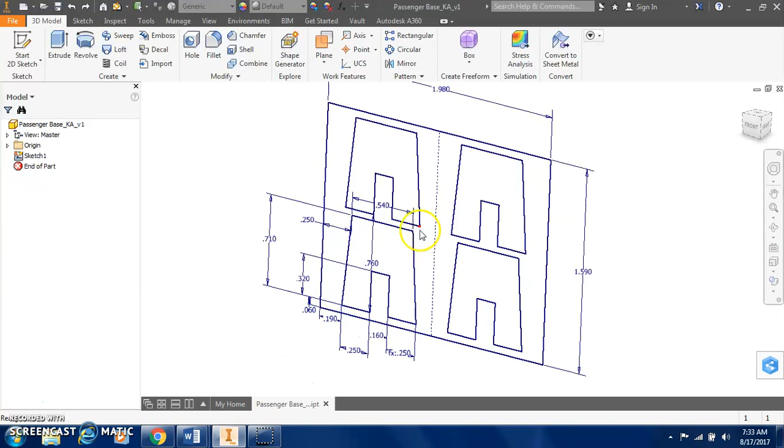One of the last things that we need to do is to create the fillet on the corners here. We can either do that before we extrude or after the extrusion. So to go back into this sketch, if I'd like to do it before extruding, double click on Sketch in the browser bar. And when we choose fillet, the radius for that is 0.2 inches.

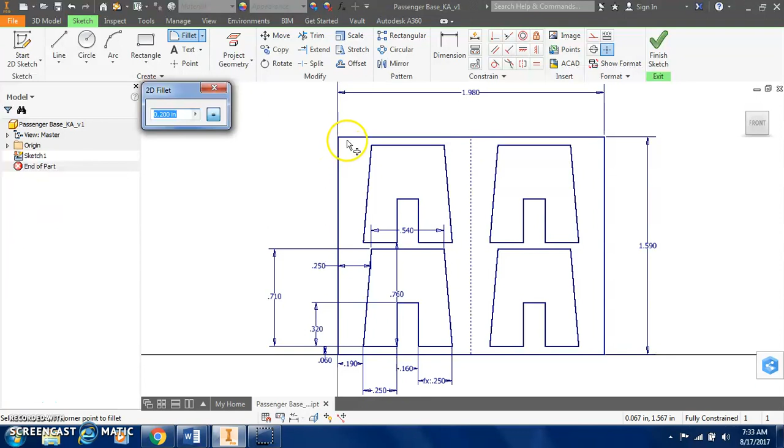And from our dimension drawing, we can see that here in the top right corner, 4 times the radius 0.2, because of course there are 4 corners for us to fillet. So we have it set at 0.2. It kind of gives us a preview of what it would look like. And so you can click in the corner to make that happen.

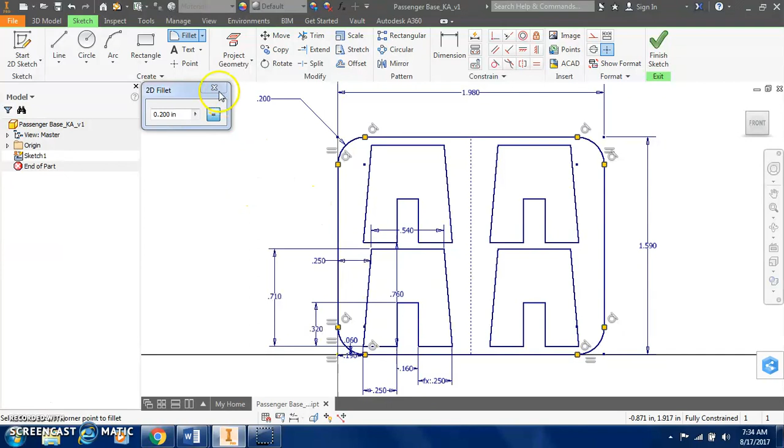And obviously it throws some things off. Ignore that for now. And just keep clicking around and it resets itself so everything is properly positioned. Alright, so the fillets are finished.

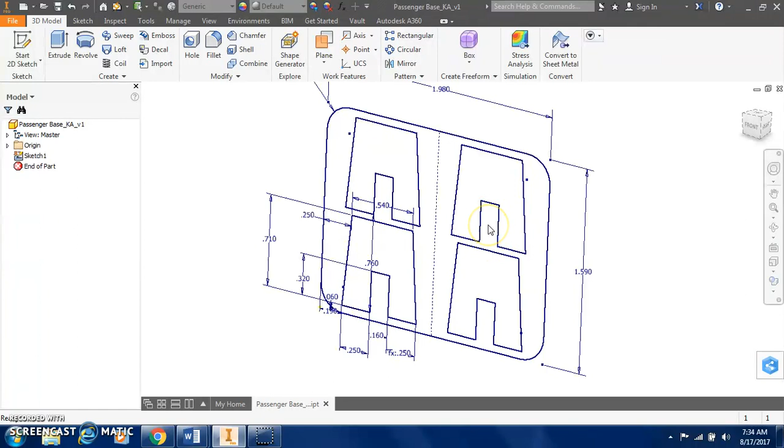And earlier I said that we would create these blocks separately. That's not what's happening here. Because of the way I've created this sketch, when we go to extrude this, it's going to extrude as well. So we'll manage that when we get there.

So let's extrude. The depth for this extrusion is 0.31. We need to select the face that we want to extrude. Make sure the distance is 0.31 and click OK.

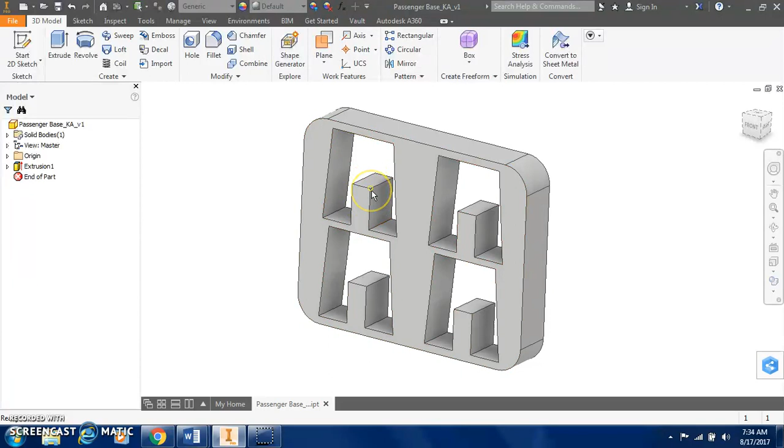So as you can see, these blocks have extruded as well, and according to our dimension drawing, we need those to sit back just a little bit from this front. The measurement for that is 0.03 if you were to measure that with dial calipers.

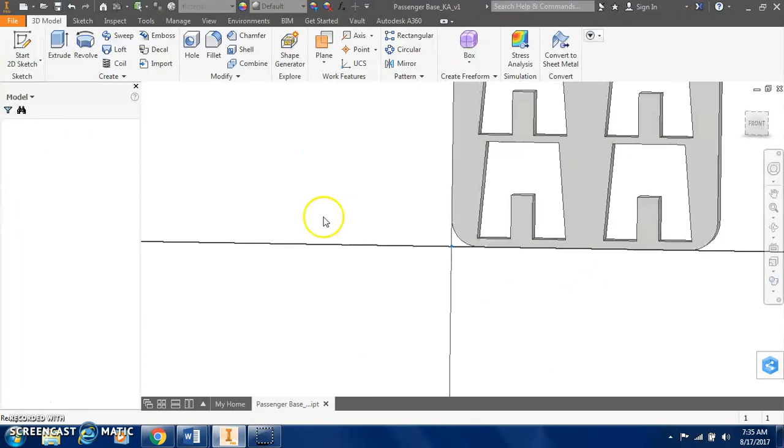So back in Inventor, we're going to create a new sketch on this front face, and we're going to start by projecting geometry. That way we can place a rectangle here, and we'll create a cut to push it back that 0.03.

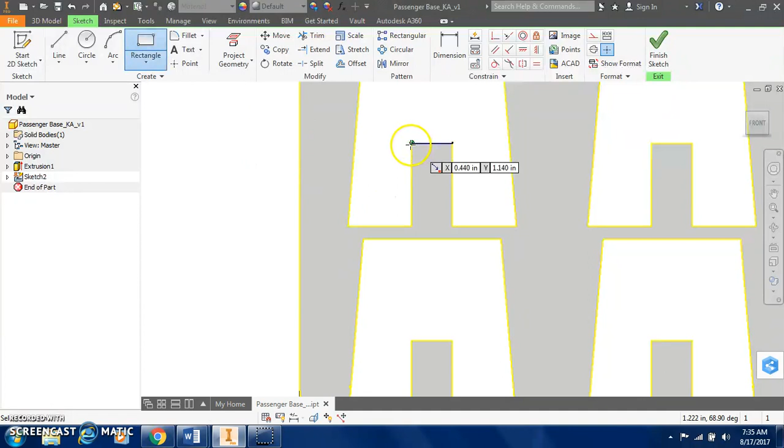So let's place a rectangle on the front of each one of these blocks. Be sure things are turning green in the corners to make sure it's lining up properly with the geometry that we have.

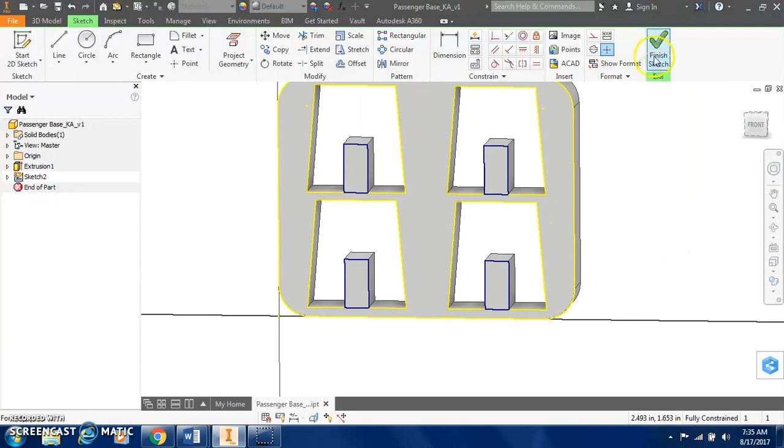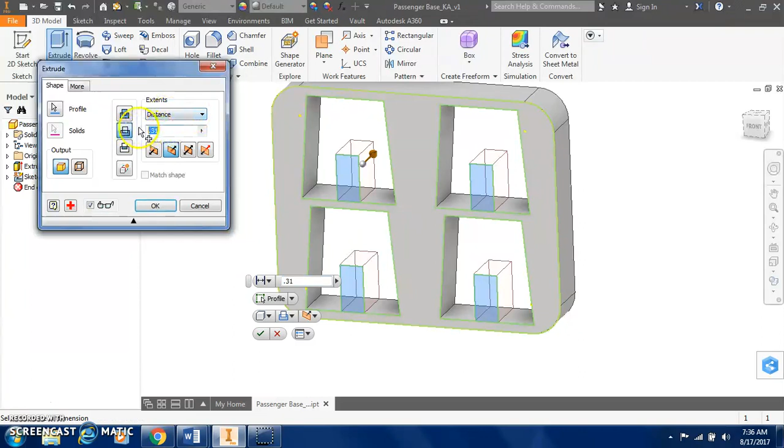And so now that we've finished that sketch, we can actually extrude all 4 of these sketches that we made, but we don't want them to pop out. We actually want them to be a cut going the opposite way as it's showing now. And yes, we do want a specific distance. It's going to be 0.31. Click OK. And it cuts them back just that much. This would be a good time to save.

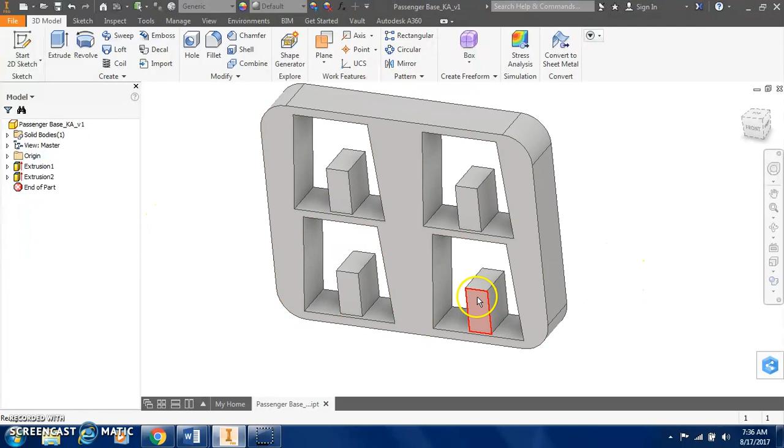There are a couple more steps that we need to take. One is to fillet and round off these corners. So according to our dimension drawing, this fillet that's happening on the front of the block, 4 of those times the radius of 0.05. So when we choose fillet, now we're in the 3-dimensional piece, and we do need to select the edge, that front edge of the corner.

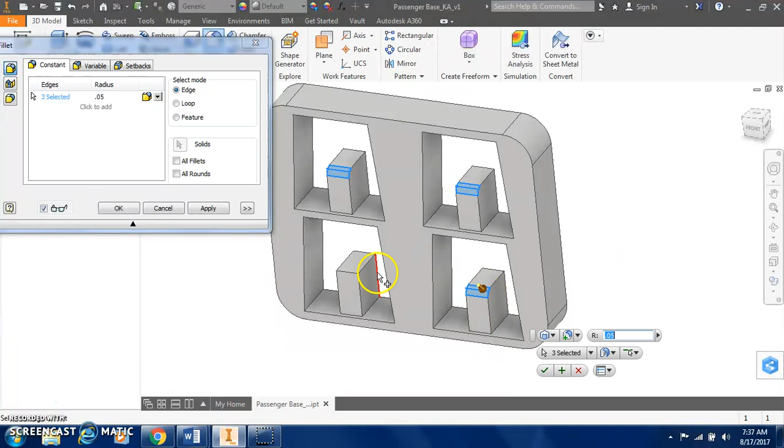And, oops, got it set at 0.125, and we want that at 0.05. Okay, so change that one to match. There we go. And click Apply. And we can X out. So our fillets look good there.

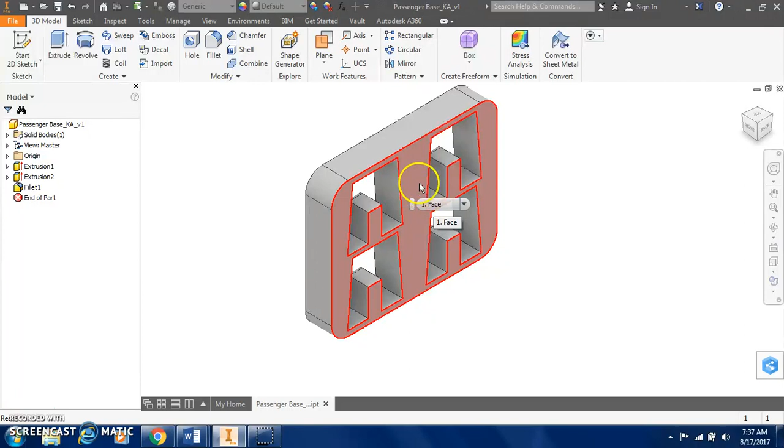We also need to flip around to the back of this shape because the back should not be solid. We're going to shell this particular plate. That helps reduce weight, helps reduce materials, costs. So we do need to select shell, select this back face, and change the thickness to 0.01. Click the check mark or OK.

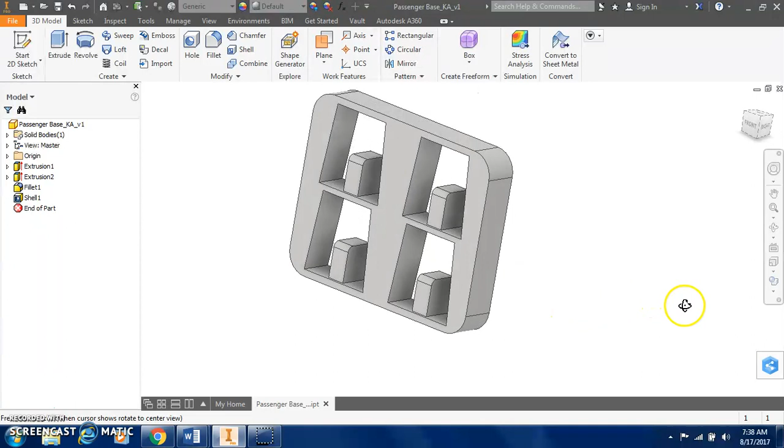And now it essentially looks a little bit like a cookie cutter, but we have our shell. If you want to change the color or change the material, ABS plastic. I like the blue wall paint. It's glossy, it's shiny. And we have the passenger base plate. Now's a good time to save.